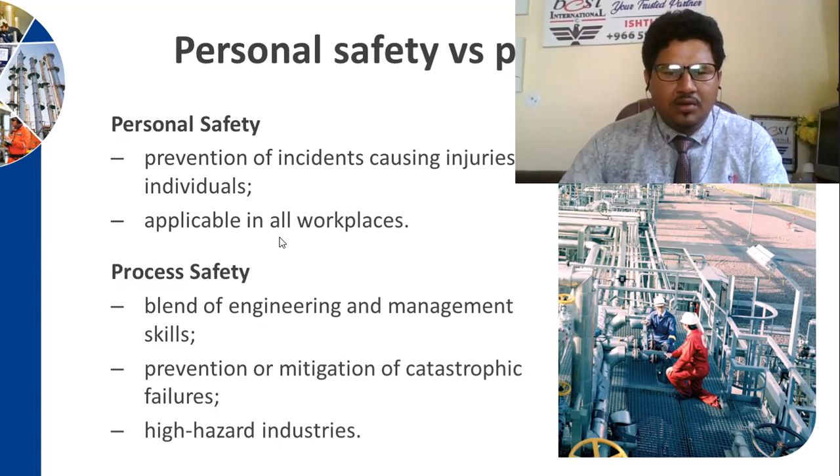Now the second part of this training is all about process safety leadership. Let's discuss.

Now, as an examiner, since this will have some MCQs with multiple options, make sure from each slide you are capable as an examiner also of how to create a question, even though the answer is already available within the slide, you must be capable of how to create certain questions.

Like, what is the difference between personal and process safety? The difference is the following, and he will give multiple options, and then you must be capable to find out the right answer, because personal means it's all relevant to your employees, the individuals, and process means it's all relevant to engineering, right?

So the second part is all about process safety leadership, and we're going to discuss hazard and risk awareness of the leadership team. It's very important. It's not like only the safety officer or the safety manager have to be trained enough.

Your president, your board members, your CEO, your managing director, your project managers, your operation managers, they all have to be trained, there must be better awareness for them, especially relevant to hazards and risk, because they are the leadership teams.

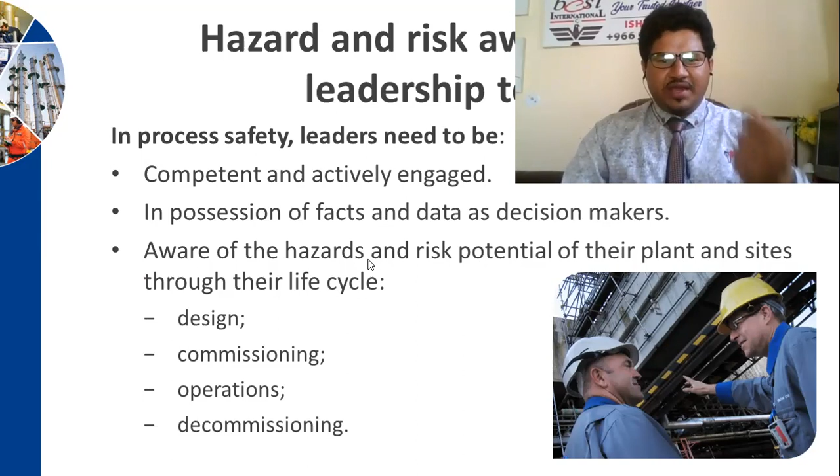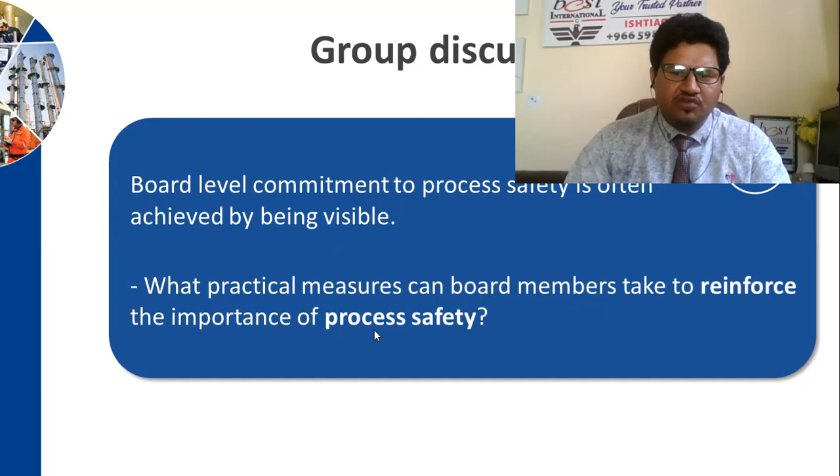Now, again, a group discussion is there. Board level commitment to process safety is often achieved by being visible. What practical measures can board members take to reinforce the importance of process safety? This is just food for thought for you, start thinking about it. But anyhow, the board level visibility mentioned by NEBOSH is all about the principles of process safety leadership, which place emphasis on board level visibility.

So you have to be visible, be on board, be visible to everyone that you are engaged, you are involved, even as a general manager, or as a managing director, or as a project manager, or operation manager. You are directly involved for process safety, even as a safety manager, right?

So what practical measures can include? You have to be leading by example, like wearing PPEs, don't be shy to follow safety site rules actually. Provide resources for site and the projects, don't minimize the resources, don't shrink them, because it's a high hazardous industry. One smallest mistake can create a terrible outcome, or terrible results in terms of mega incidents or catastrophic accidents, right?

So supporting the risk assessment process, you have to get involved as a leader in the risk assessment process. Carry out site visits, even asking questions. But make sure you ask the right, technically and logically correct questions. You must be capable of how to create or ask such questions.

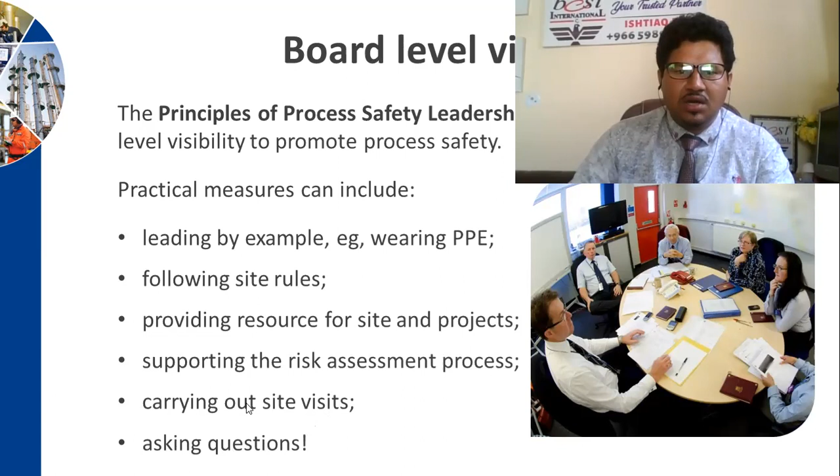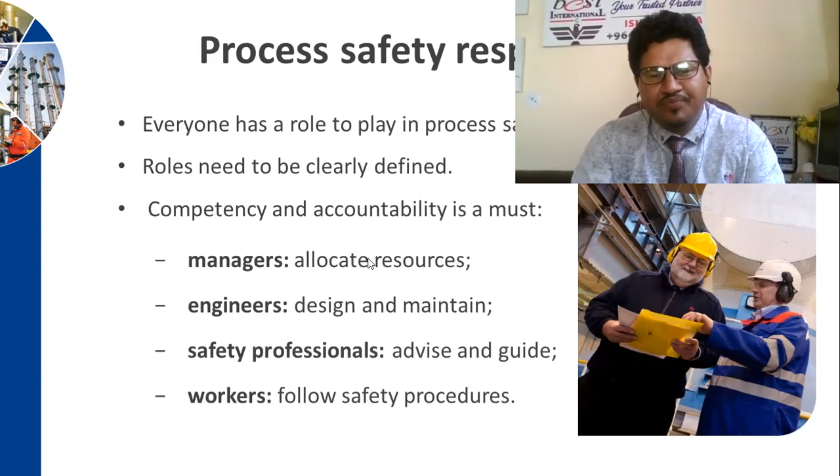And workers, they have to follow the safety procedures, but error-free, technically sound, good safety procedures. There shouldn't be any gap, because if a procedure is technically missing some important steps, or maybe some important process parameters, it can anytime lead to a major incident, right? So make sure whatever rules, procedures, SOPs, standard operating procedures, or safety policies, or even work instructions you are preparing, make sure they are error-free and good enough to follow, complying with all the relevant international standards, so you can justify it's not just your mind's capabilities, you are referring to some international standards as well within your procedures.

If one person is ignoring their duty, let's take an example: if a janitor is not cleaning all the areas, and there would be some combustible dust accumulation, imagine what could happen later on if from anywhere there would be an ignition source, just imagine what would happen. So make sure you allocate the responsibilities in a very responsible manner, encourage engagement, and look for root causes, but the real, underlying root causes are important here.

Please avoid blame culture. It's not blame or shame always, because in process industry, you have to understand what was missed during your input, or what is not followed during the process. And then of course, if input is not good or the process is not followed as per standardized procedures, the outcome would be terrible.

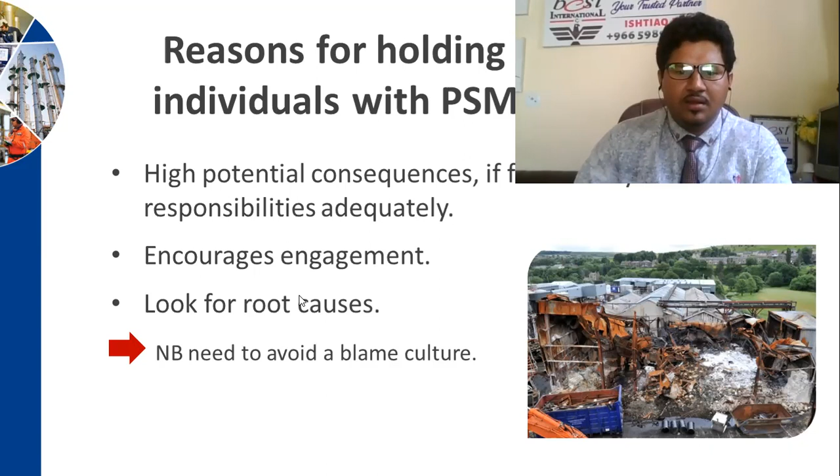What are the responsibilities of the CEO and leaders to assure the organization's competence to manage the hazards of operation? Make sure at the senior leadership level, they are capable to ask critical questions. Ensure competence at all levels. You can't accept any individual, you can't hire on reference basis. Just make sure the right person for the right job.

If a person is misfit to your system, or is not capable or not competent enough, please don't hire, because one incompetent person can destroy the whole process.

Let me give you an example. If you have 100 employees, there are 100 different brains with different capabilities, competence levels, education levels, cultural backgrounds - a lot of diversity. Even though you have to avoid discrimination, the competence level, especially in high hazard industries, you truly have to ensure. Now let's take an example of one person.

If you have a 12-hour shift, 12 hours multiply by 60 minutes, so 720 minutes multiply by 60 seconds, that's 43,200 seconds. So 43,200 seconds, one brain is working within your company at any process or within the chain of processes.

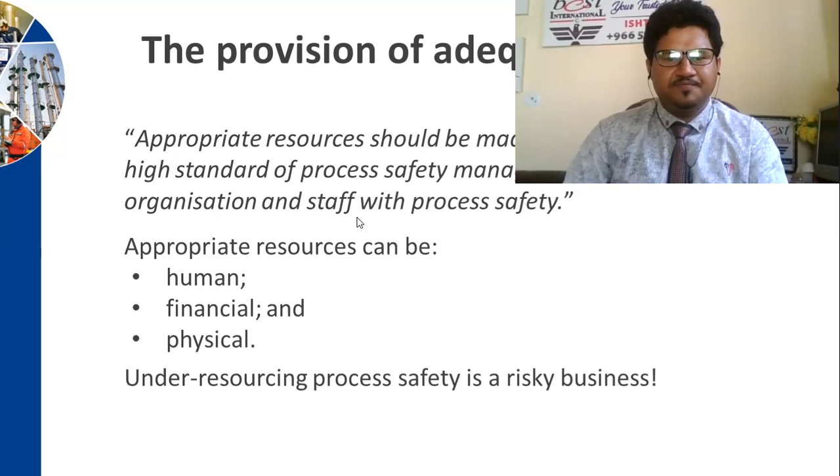Under resourcing, process safety is a risky business. Under resourcing means lack of resources, which is a bit of a danger game. So I will not recommend to play.

Now, process safety objectives and targets. You truly have to establish the overall objectives, and set some targets like stepping stones. The overall objective must be published throughout the organization, and then you need to set some targets with time bound and stepping stones.

Then, of course, you require to monitor the progress of indicators, leading or lagging. Lagging is a failure, leading is success. Leading means proactive approach - proactively doing risk assessment, risk analysis, hazard analysis or job safety analysis, process studies, and putting better controls in place. This is how you lead your success. But lagging means you are learning from your accidents or something that happened, but still it's not bad.

At least you are capable of learning from your mistakes, whether the error belongs to human or process factors. After the lesson is learned, you implement some effective controls to make sure it does not happen again.

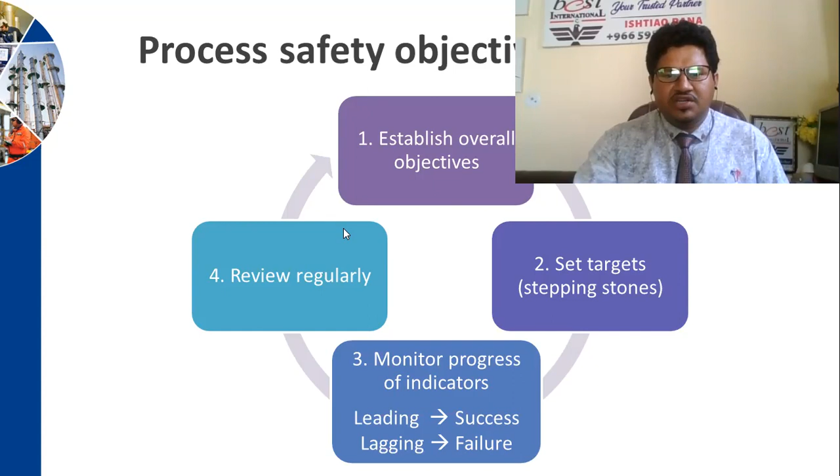Why might process safety be considered a continuous improvement process? This is again food for thought for all of you. Suggest some practical ways in which organizations can seek to improve. So please research and learn something.

Be a passionate self-learner. But anyhow, for continuous improvement, as per NEBOSH, what you exactly require is: organization change, new processes and products, new operational conditions, technology change, new equipment available. So continually, if you truly want to ensure continuous improvement, you have to learn all the new processes and products, operational conditions, and new technology available in the market, and benchmark with other organizations.

There is no harm if Saudi Aramco is doing something good - some other companies can visit their sites and see how they are maintaining this continuous improvement process, and there is no harm to benchmark and follow their best practices.

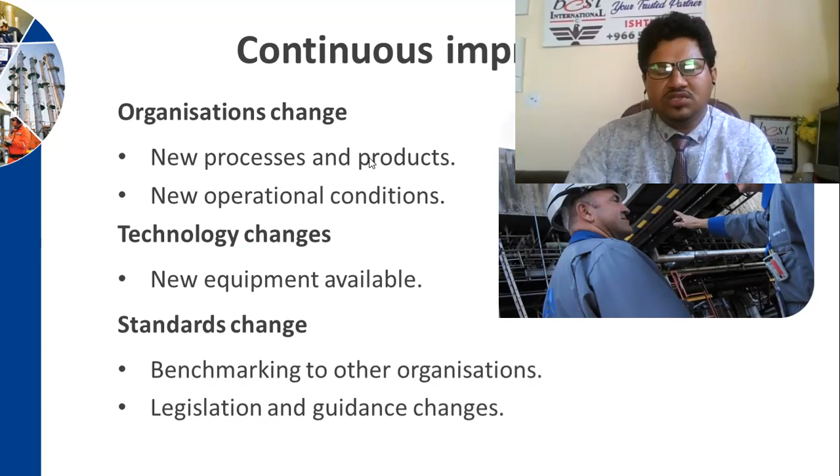Now, legislation and guidance changes, because government is also involved. As a government of any country, no government wants any accident within their country, because that would create bad goodwill for that country, and other countries would avoid giving certain projects or installing manufacturing or high hazardous industries there. It's the overall responsibility of the state to make sure legislation and guidance changes are also there, and you need to keep an eye on new research documents or new regulations which you truly need to follow to ensure continuous improvement.

Okay guys, so that was all about process safety leadership. Think as an examiner, create some questions by yourself and have some MCQs, even though the answer is already there in the presentation.

Now, organizational learning, the third part of process safety leadership, the first element of this training. What is organizational learning?

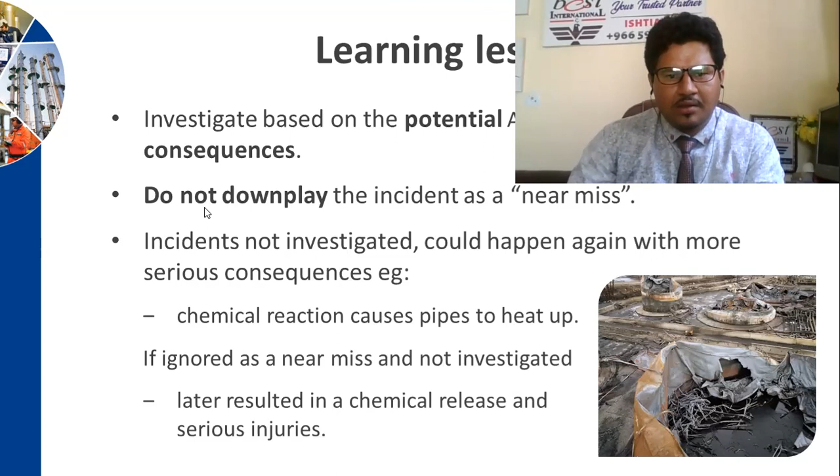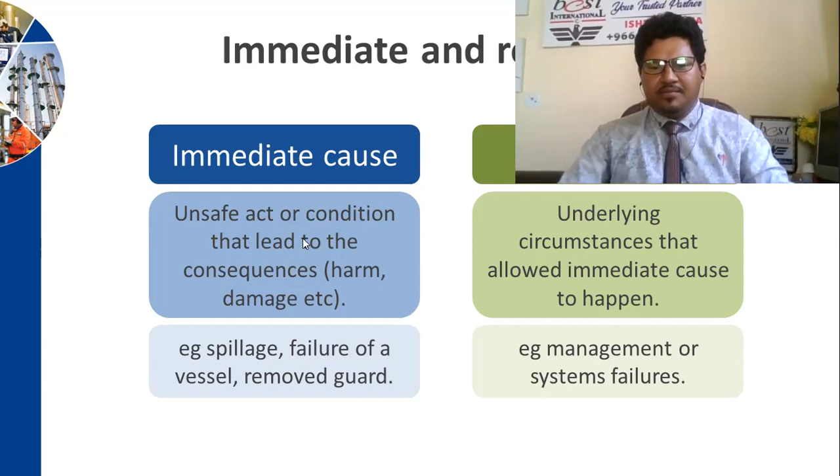Now you have to understand the immediate causes and root causes. What is an immediate cause? An unsafe act or condition that leads to the consequence, harm or damage - could be spillage, failure of a vessel, removed guard. And what is a root cause? Underlying circumstances that allowed the immediate cause to happen. Please understand immediate cause and root cause, and don't mix them, otherwise it would be difficult to investigate properly.

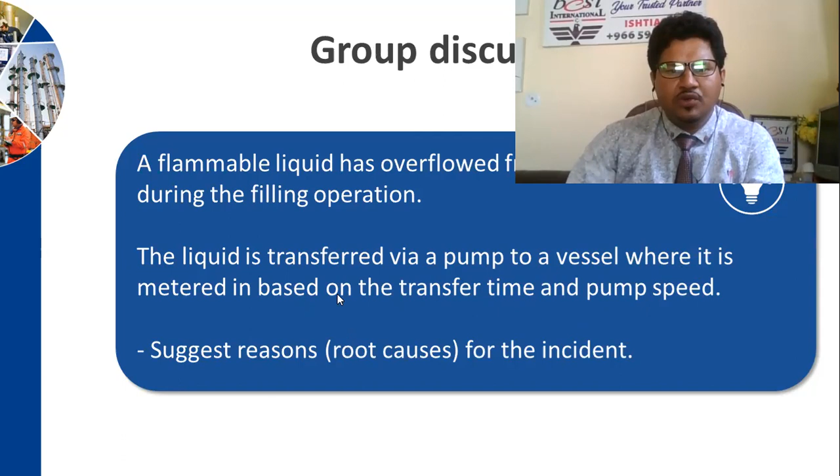You need to start thinking and take some time, otherwise see the possible root causes: pump changed for a higher rate, poor or no management of change process, failure of high level alarm, no automatic cutoff, operator error, poor initial risk assessment, process changes, or bigger batches than design intent. So these are some of the root causes.

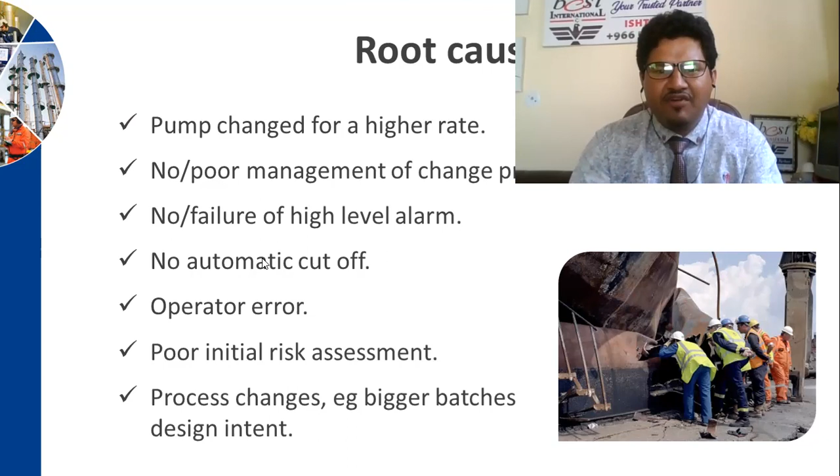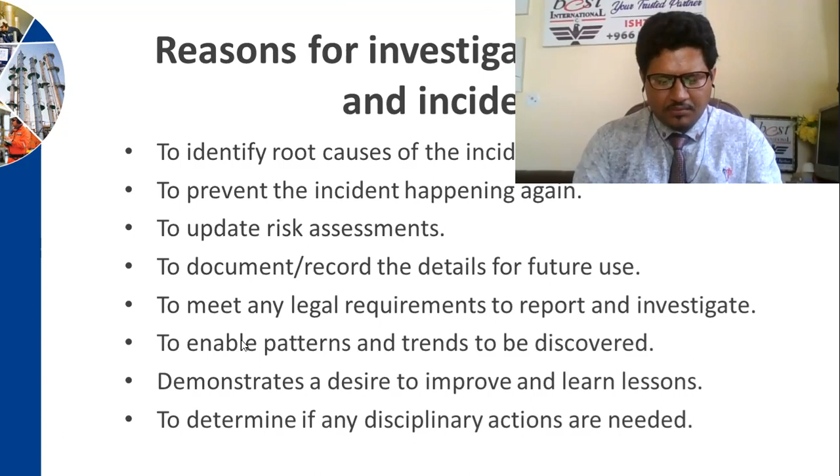Now, what are the benefits if we start investigating the accidents and incidents? What would be the benefit?

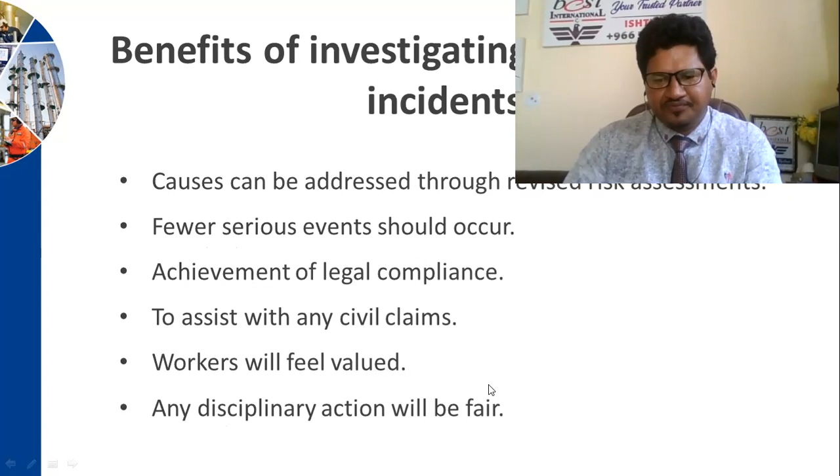Fewer serious events should occur. Achievement of legal compliance also helps assist with any civil claims. Workers will feel valued, and any disciplinary actions will be fairly tackled because of this investigation.

Now, retention of corporate knowledge. How much and what kind of corporate knowledge do you truly need to avoid corporate amnesia? That means retaining information formally rather than relying on individuals. You need to retain and take some backup of all information. Don't rely on individuals.

Make sure you are retaining all formal information, especially lessons learned, decisions, and designs. Remember this: retention of corporate knowledge. You have to avoid corporate amnesia, meaning retain information formally rather than relying on individuals. So don't rely on individuals, rely on the system. The system says you need to retain it.

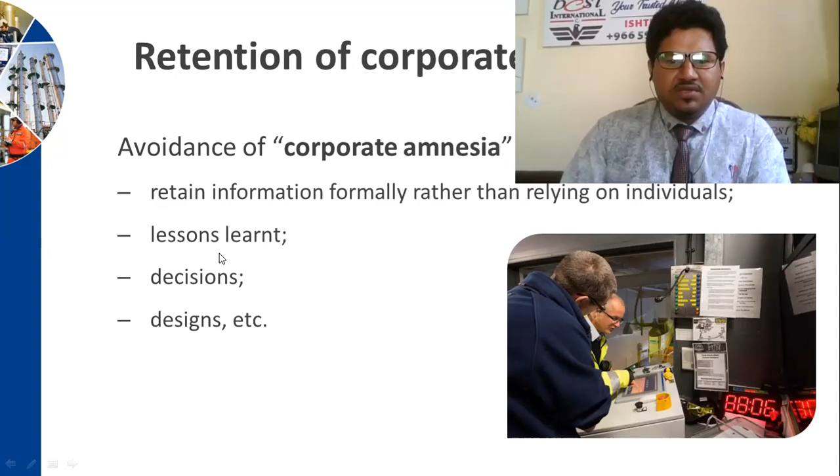There must be a backup of every sort of informational record that would support you, especially data belonging to lessons learned from previous incidents in different scenes. That's also the history of the scenes we require, and the design patterns gradually, if upgraded or whatever designs are there, make sure you have a complete history.

Lesson learned and benchmarking: lesson learned, findings of action and incident investigation, striving for continued improvement. Whatever the lesson learned, make sure you have certain findings of action and incidents well recorded, and accordingly you are striving for continual improvement. Continual improvement is the major goal, or I would say the prime goal.

So what do you need to benchmark—comparing an organization against what? He can create a question: what is benchmarking? And he will give some examples of benchmarking, with multiple options. Remember, it's comparing an organization against another organization, a national standard like HSE, accident statistical publications, or operational standards. Make sure you understand exactly what you are benchmarking.

Are you benchmarking some of the standards of OSHA? Are you benchmarking some of the internal SOPs of Saudi Aramco, Sadara, SABIC, Royal Commission, or others? You just need to be clear whether you're benchmarking standards from ASTM or API, American Petroleum Institute. So whatever standard you are benchmarking, make sure you clearly understand and start comparing, especially with organizations already getting successful results.

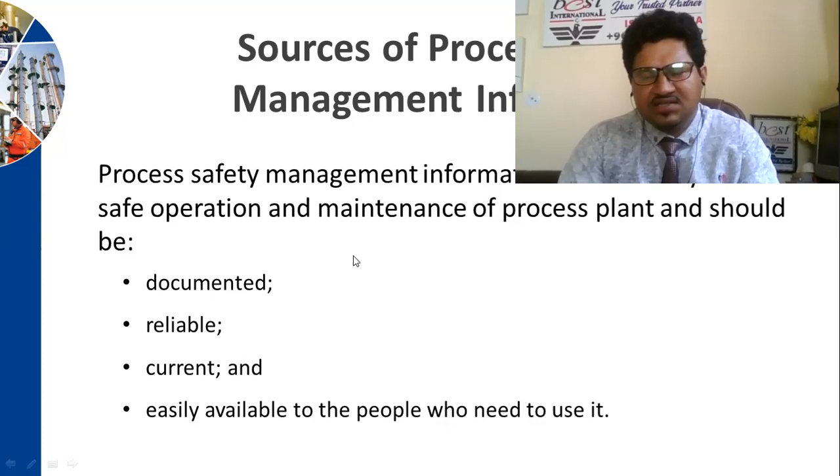So there are sources of process safety management information. Process safety management information is necessary for the safe operation and maintenance of a process plant and should be documented, reliable, current, and easily available to the people whenever and wherever they need it, and to whomever requires this information. Make sure all process safety management information is well documented, reliable, current, and easily available to the concerned process owners.

Now, what are the sources of process safety management information? In the previous slide, it was all about why it is required—it should be documented, reliable, current, and easily available. Now, what are the key sources?

You must have things like safety data sheets related to a certain process, process design criteria, process flow diagrams (PFDs), SOPs like safe operating procedures, inspection, audit and investigation reports, maintenance records, piping and instrument diagrams, process control systems, relief system design, and fire detection and protection plans. All this internal information must be easily available. It's not like, 'oh, I'm the safety manager or project manager and I need to keep all the information in my cabinet'—no. It must be easily accessible to the process owners, the people.

If a welder is doing welding or a driller is involved in drilling operations, they need certain SOPs to be easily accessible. If a chemical is there and you are putting MSDS within your cabinet, what would be the benefit? Give them, show them, display for the process owners.

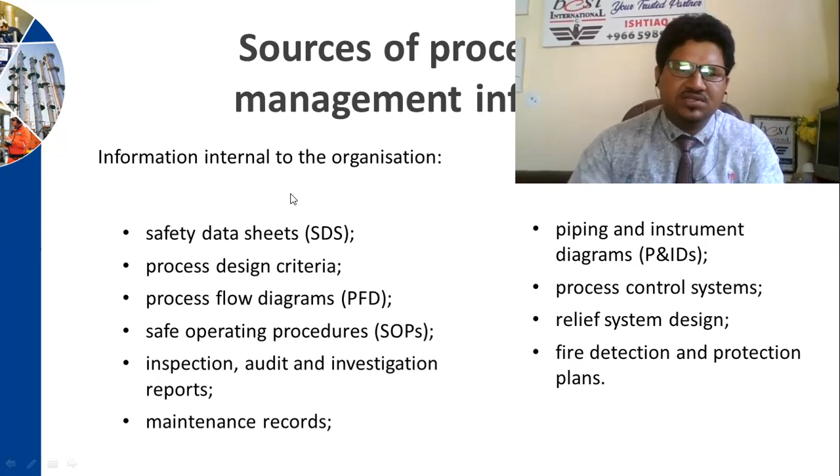Now, here again, the examiner has a right to create a question: what are the main sources out of the below list, what are the main sources of information for PSM or for process safety? He can give certain options and see how you select them.

Now, there are some other sources of process information, mostly external ones. Information external to the organization includes EU directives, the UK Health and Safety Executive (HSE), OSHA - Occupational Safety and Health Administration of USA. Harmonized European standards can also be referred to, as well as British standards, International Labour Organization (ILO), trade associations, professional bodies, or even the Institute of Chemical Engineers.

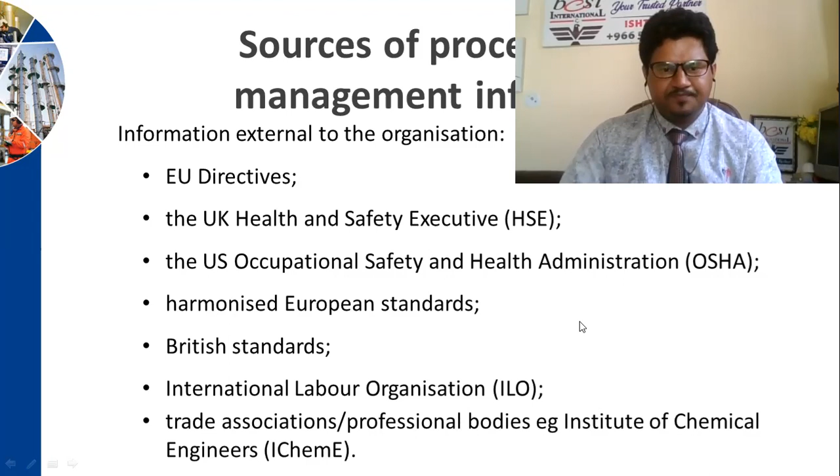Think about the sources of information available in your organization to assist in process safety management. Are they documented, reliable, current, and easily available to the people who need them? Make sure all the sources of information are well available.

Now, management of change. This is one of the critical sub-elements of process safety leadership. Whenever there is a change, it's not simple, because one small change will definitely have an impact on other processes. Let's take an example.

Imagine you have a four-wheeler car, and one of the tires is really bad, so you bring a new one, but the other three tires aren't good either, yet you believe they will still work. But think about the balance and the safety factor, because the new tire and the three old ones will start impacting each other, and the whole process would be disturbed. On the other side, imagine you're changing the motor belt without considering other elements, or overhauling the engine without seeing the impact of overspeeding or not driving safely until the engine is running properly.

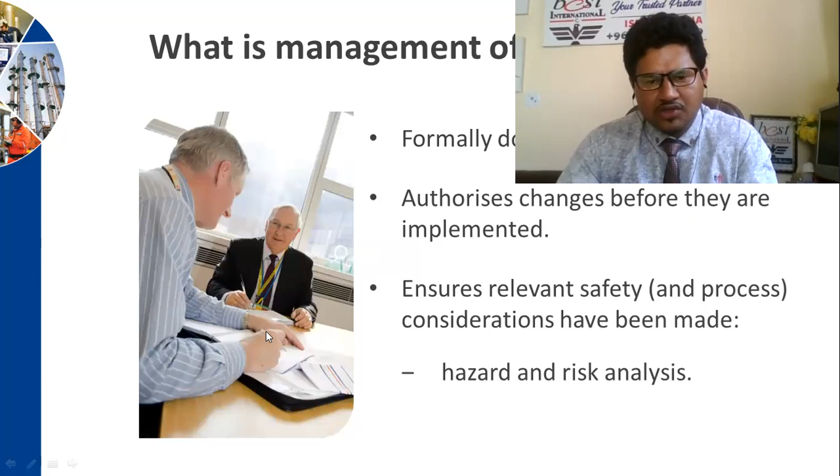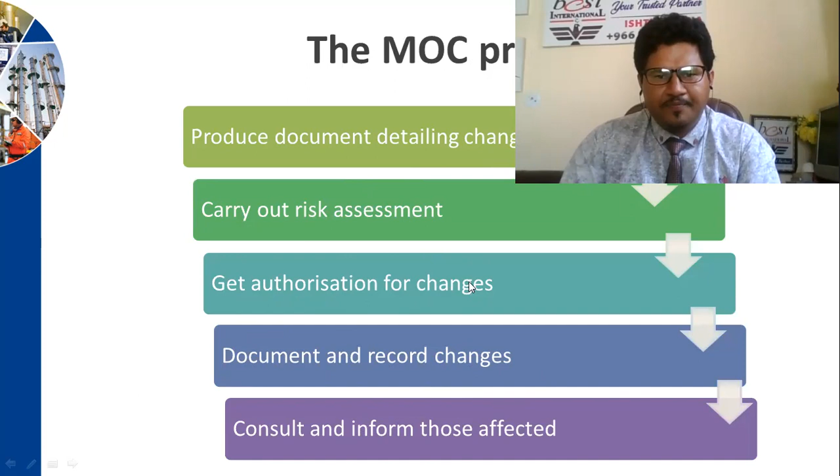Worker engagement is all about consultation and informing. You need to understand the difference and how you consult with workers. An examiner might ask what is the difference between consultation and informing - consultation is a two-way exchange of information between two parties, in this case between employer and worker. This is far more effective than the one-way exchange that happens when people are simply informed. Now, what are the limitations and benefits of consulting?

Of course, everything has some benefits, pros and cons, and some limitations. The benefits of consultation is it will improve relationships, demonstrates commitments, improves safety culture, gains cooperation from workers, harnesses workers' practical knowledge.

Because you are consulting, you are not only informing, you are consulting. So it's a two-way process. The person is in front of you. It's a face-to-face discussion. But there are certain limitations, like not all matters can be consulted on.

It's really hard to discuss everything, takes time, which might not be available. Poor consultation processes are worse than no consultation. So make sure your consultation is effective, otherwise if your message goes wrong, nobody would be supporting at all.

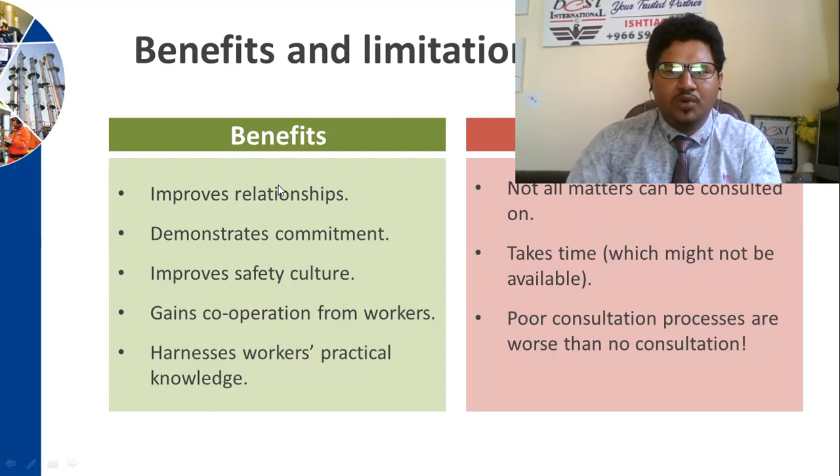Now, when consultation is needed, that's another important point you need to bear in mind. Whenever you are introducing change that could affect health and safety, new plant, process, or work methods, make sure you are consulting. You are calling safety meetings, toolbox meetings, or getting together, and make sure you discuss all the new changes you are introducing.

Now, whenever you are implementing new technology, you have to consult, not inform. You need to consult, and it's a two-way communication. Now, when appointing safety advisors, make sure you have better consultation, development of training plans needs consultation, reviewing health and safety performance, learning lessons from incidents and near misses.

As a training manager or trainer, I always recommend companies please call us. We will sit with you, understand the current competence level of all the individuals, and recommend some customized trainings to enhance the competence level of your employees. And if you already have done a training need assessment, share with us, and we will design, customize, or offer trainings to improve the competence level of your workforce.

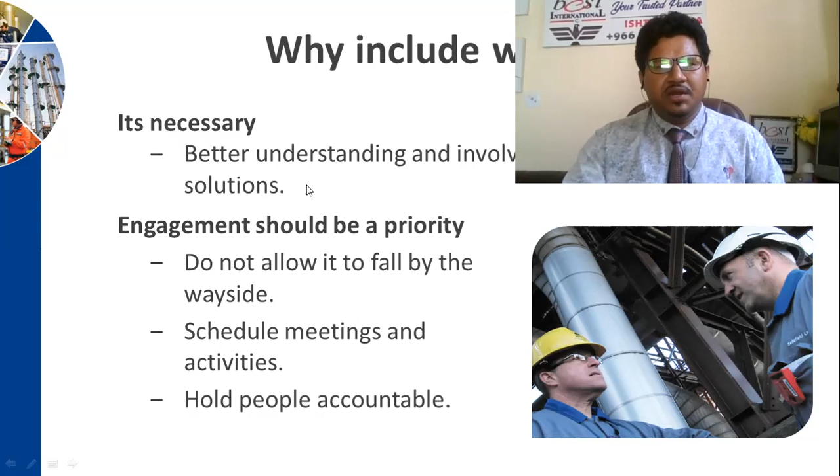Now, competence, the last sub-part of this process safety leadership, is all about competence. The ability to undertake responsibilities and perform activities to a recognized standard on a regular basis is a combination of practical and thinking skills, experience, and knowledge. So remember SEK: skills, experience, and knowledge. When this triangle comes together with this combination, you can say competence is well achieved for a particular person or employee.

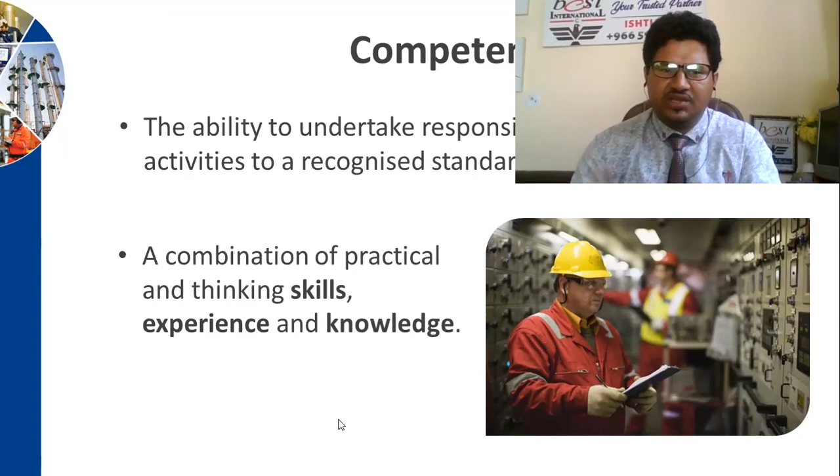What is the role of competence in safe working and behaviors? Training in how to do the job safely, operational procedures, emergency procedures, benefiting from training and understanding the job. So work safely, train to understand, and do it right the first time. These are some of the roles of competence in safe working and behaviors.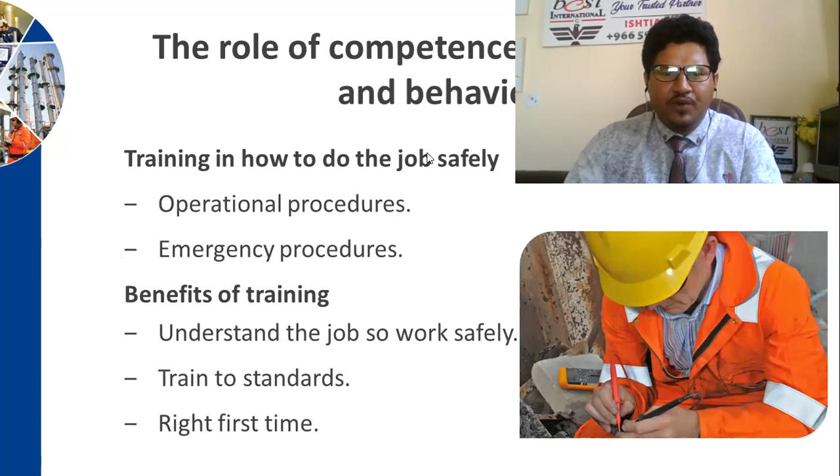How you need to enhance competence further. The competency analysis must be a continual part of your continual improvement. It's not like one time you did it and later on you forget to update it. It must be updated whenever somebody is well trained, or he attended a PTW training like permit to work. So don't forget to note here, because this production operator attended permit to work. So if he is attending more and more training, don't you think he'll be more productive?

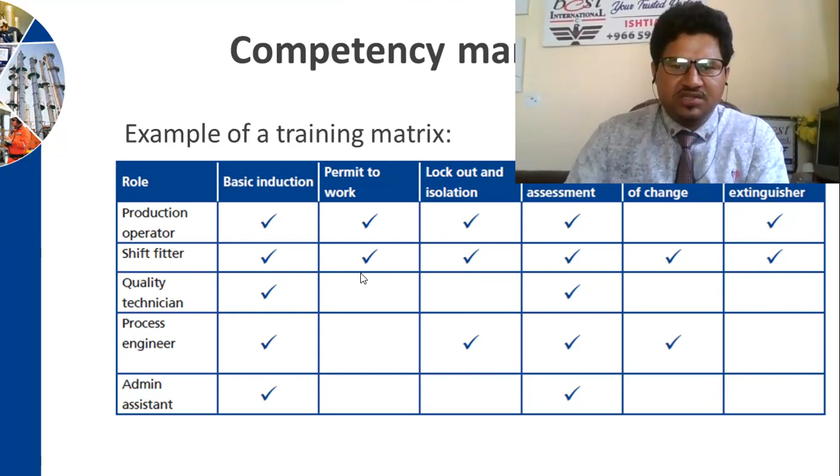But make sure, first of all, they are trained with the relevant trainings to their profession. It's not like giving all the trainings and later on you become jack of all trades, master of none. So make sure you design, plan, and customize trainings as per the nature of their job or their profession. I hope you understood - that's why training need assessment is very much important.

Now, what is competency management? How are we going to manage this competence? Make sure, first of all, you have established policy, determined minimum competency standards, recruited workers, assessed competency as an ongoing process, maintained and developed skills, analyzed skill gaps, built emergency management skills, and gained ownership and commitment.

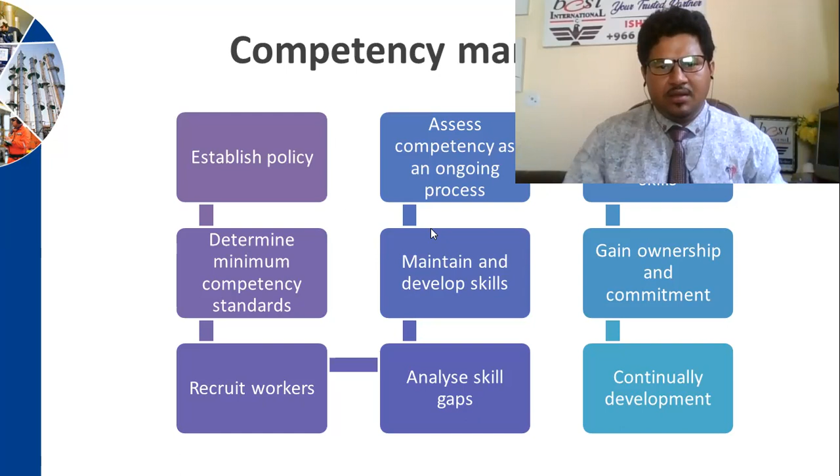And most importantly, ensure their continual development, because it's a high hazard industry. So competence level should be enhancing day by day for every one of your employees.

Now, process safety training must be part of all the departments, at every level - especially for the process safety leaders, even for managers, supervisors, designers, safety advisors, newly qualified managers, operators, and even technicians. All have to be trained for this process safety. They must join or attend this process safety training.

So if you need any trainings for your technicians or operators, we can customize based on OSHA standards or based on some NEBOSH theory. We will customize better, easy to understand training for your operators and technicians even. So if you need this training, just feel free to contact me, 00966 59 3439.

Otherwise, NEBOSH PSM already exists for managers, supervisors, designers, safety advisors, or newly qualified managers - they can join directly the NEBOSH PSM. But if you bring in the technicians and operators, it would be harder for them to pass the exam. So it's better to customize and redesign the training material for them to make it easy to understand.

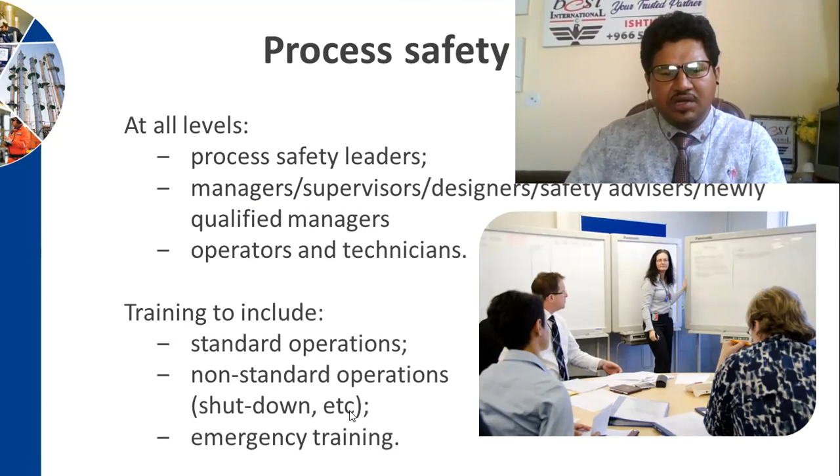But the benchmarking must be like OSHA standards, or ASTM, or API, or some combination from NEBOSH theories, even with some practical examples. But remember, the training should include standard operations, non-standard operations like shutdown, etc., and emergency training as well.

So that was the summary of element one, process safety management. We discussed PSM meaning. We discussed PSL, process safety leadership. We discussed OL, organizational learning. We discussed MOC, management of change. We discussed WE, that means worker engagement, and also competence. And that was the video of element one of process safety, NEBOSH process safety management training.